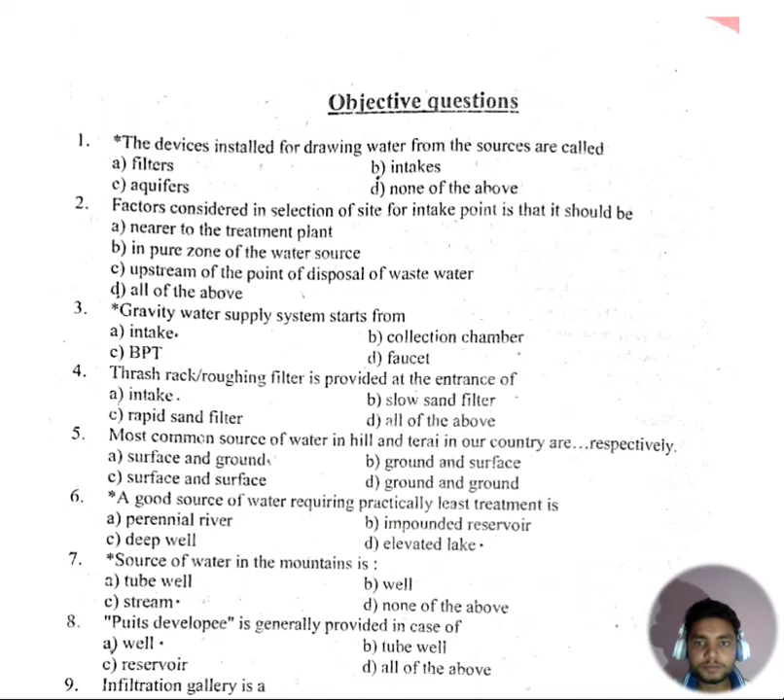Question number 4: A thrash rack roughing filter is provided at the entrance of. A is intake, B is slow sand filter, C is rapid sand filter, D is all of the above. The correct answer is A, intake.

Question number 5: Most common source of water in hill and terai in our country are respectively. A is surface and ground, B is ground and surface, C is surface and surface, D is ground and ground. The correct answer is A, surface and ground.

Question number 6: A good source of water requiring practically least treatment. Option A is perennial river, B is impounded reservoir, C is deep well, D is elevated lake. The correct answer is option D, elevated lake.

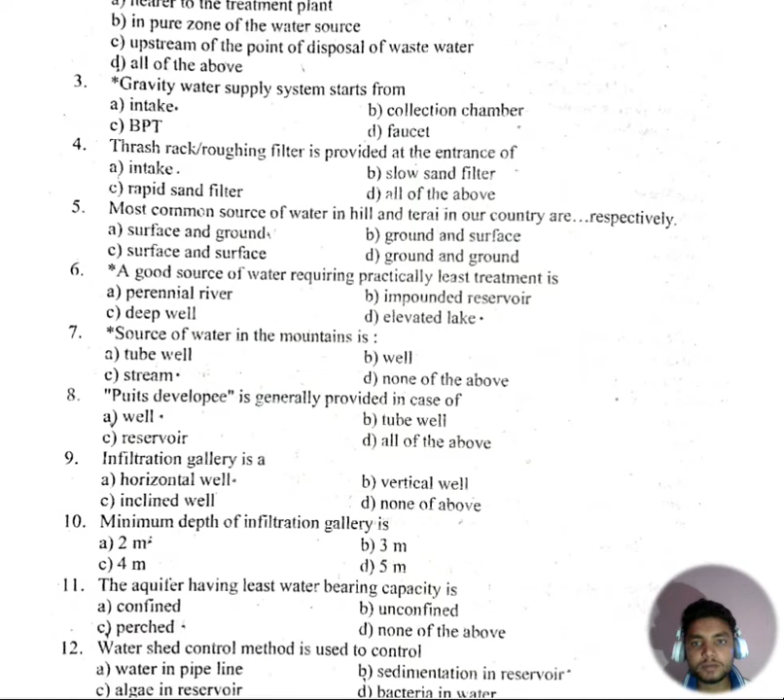Question number 8: Puits developee is generally provided in a case of. A is well, B is tubewell, C is reservoir, D is all of the above. The correct answer is option A, well.

Question number 9: Infiltration gallery is. A is horizontal well, B is vertical well, C is inclined well, D is none of the above. The answer is horizontal, option A.

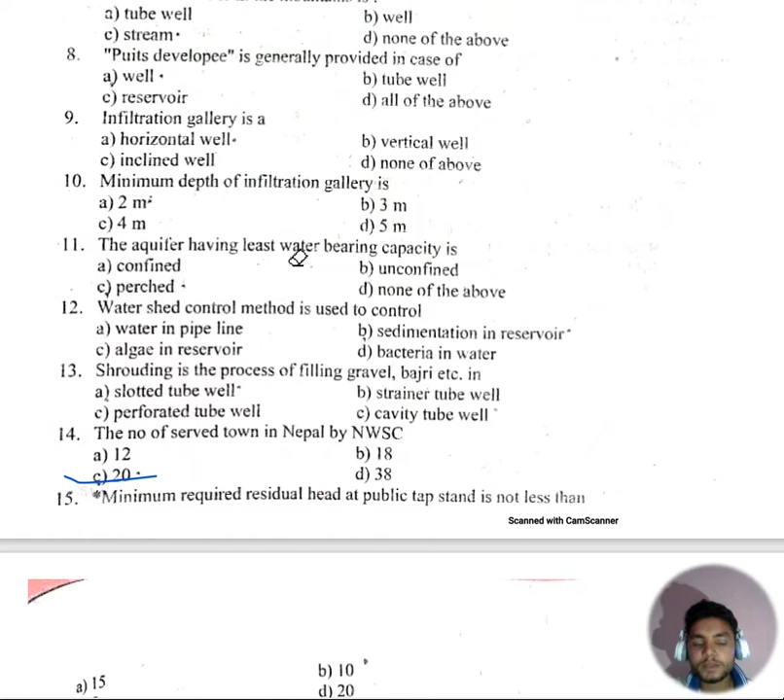Question number 15: Minimum required residual head of public tap stand is not less than. A is 15, B is 10, C is 5, D is 20. The correct answer is 5.

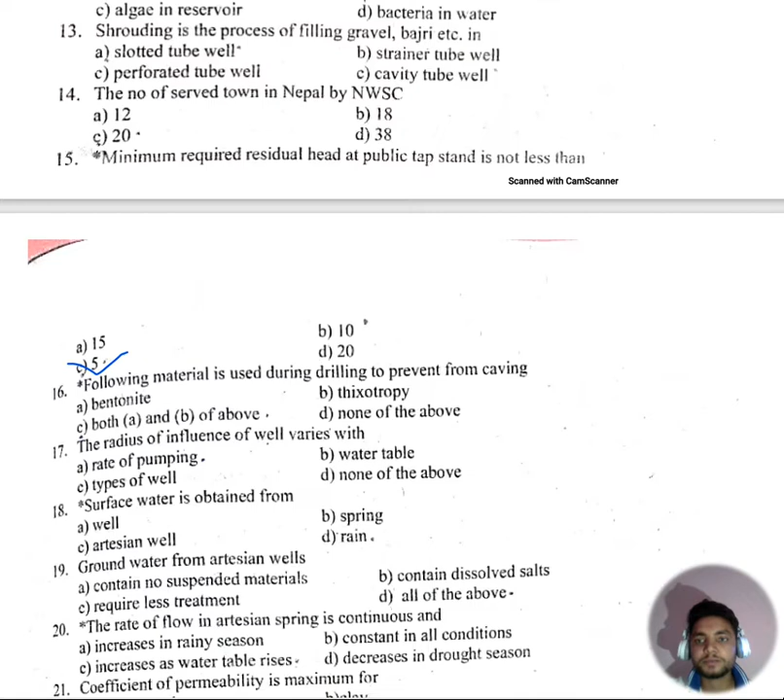Option number C. Question number 16: Following material is used during the drilling to prevent caving. Options are A - bentonite, B - thixotropy, C - both A and B, D - none of the above. The correct answer is option C, both A and B.

Question number 17: The radius of influence of well varies with. A is rate of pumping, B is water table, C is type of well, D is none of the above. The correct answer is A, rate of pumping.

Question number 18: Surface water is obtained from A) well, B) spring, C) artesian well, D) rain. The correct answer is D, rain. Surface water is obtained from rain.

Question number 19: Groundwater from artesian wells - A) contains no suspended material, B) contains dissolved salt, C) requires less treatment, D) all of the above. The correct answer is option D, all of the above.

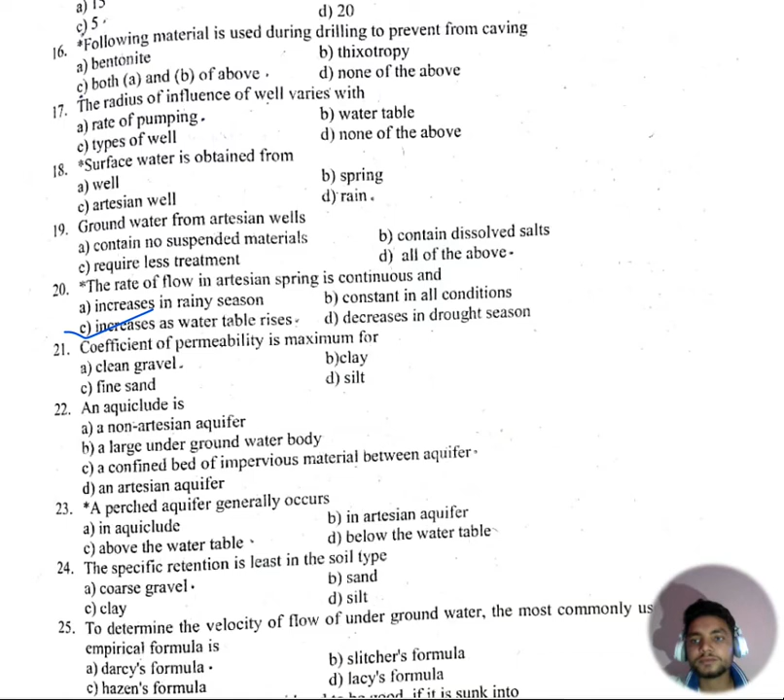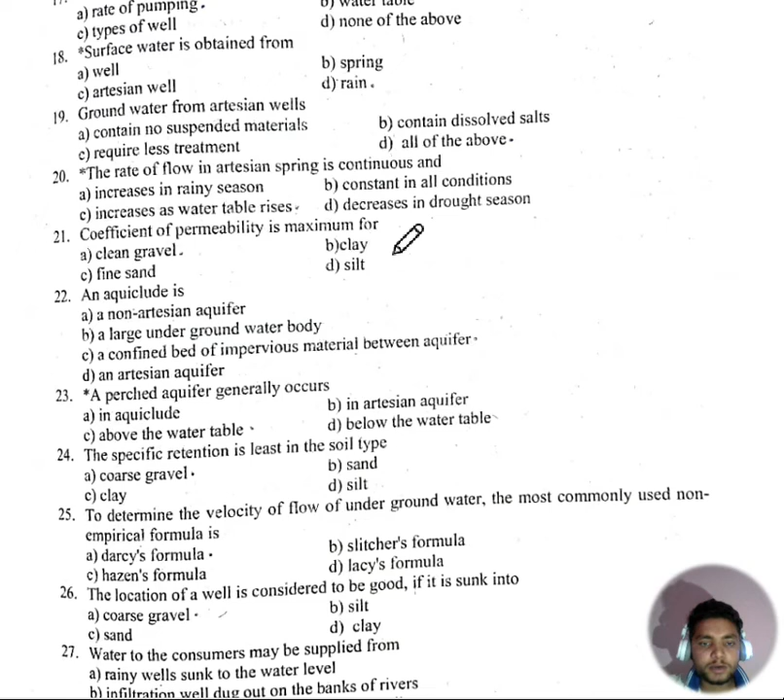Question number 21: Coefficient of permeability is maximum for clean gravel, clay, fine sand, and silt. The answer is clean gravel.

Question number 22: An aquiclude is A) a non-artesian aquifer, B) a large underground water body, C) a confined bed of impervious material between the aquifer, D) an artesian aquifer. The correct answer is C.

Question number 23: A perched aquifer generally occurs - A) in aquiclude, B) in artesian aquifer, C) above the water table, D) below the water table. The correct answer is option C, above the water table.

Question number 24: The specific retention is least in which soil type - A) coarse gravel, B) sand, C) clay, D) silt. The correct answer is A, coarse gravel.

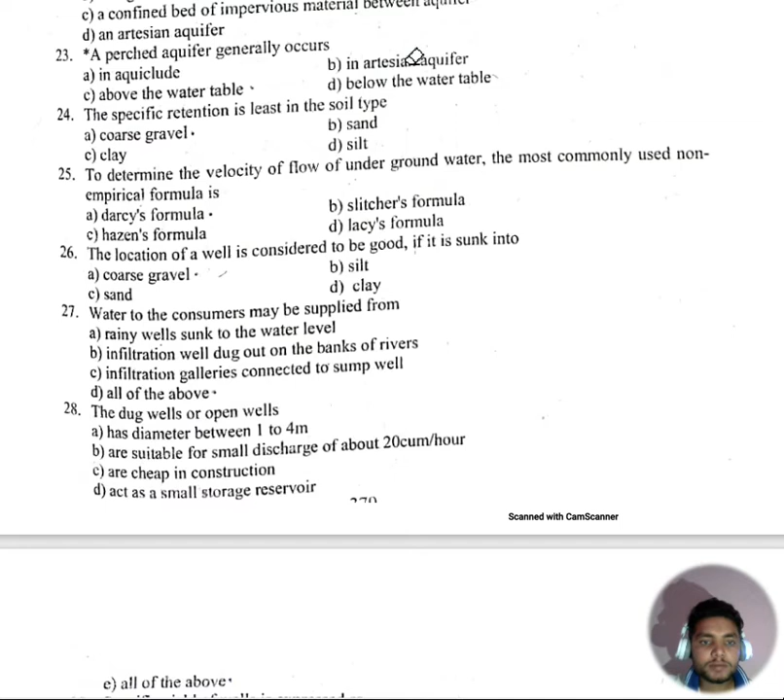Question number 25: To determine the velocity of flow of underground water, the most commonly used non-empirical formula is A) Darcy formula, B) Slichter's formula, C) Hazen formula, D) Lacy formula. The answer is Darcy formula.

Question number 26: The location of a well is considered good if it is sunk into A) coarse gravel, B) silt, C) sand, D) clay. The correct answer is coarse gravel.

Question number 27: Water to the consumer may be supplied from A) a rainy well sunk to the water level, B) infiltration wells dug out on the bank of the river, C) infiltration galleries connected to the sump well, D) all of the above. The correct answer is D, all of the above.

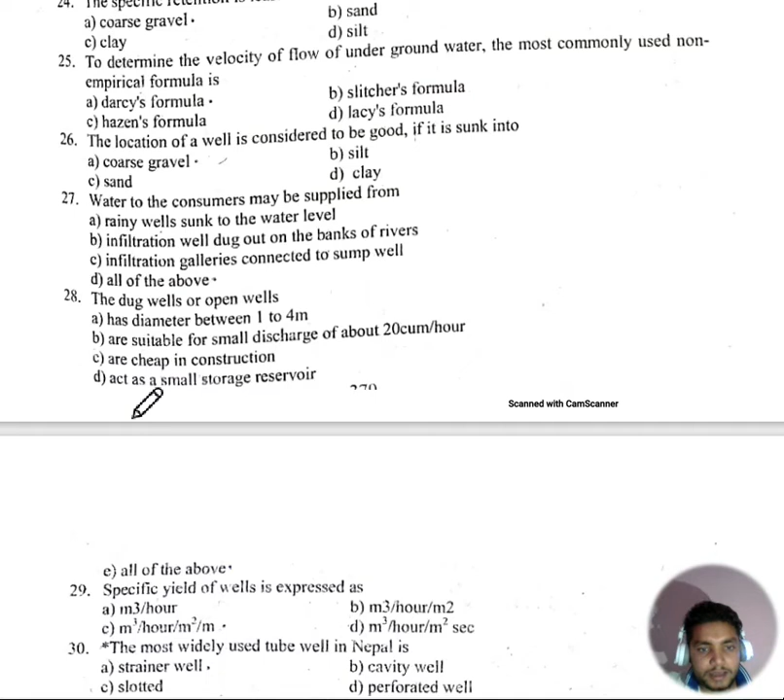Question number 28: The dug wells or open wells - A) have a diameter between 1 to 4 meters, B) are suitable for small discharge of water about 20 cubic meters per hour, C) are cheap in construction, D) act as a small storage reservoir, E) all of the above. The correct answer is all of the above.

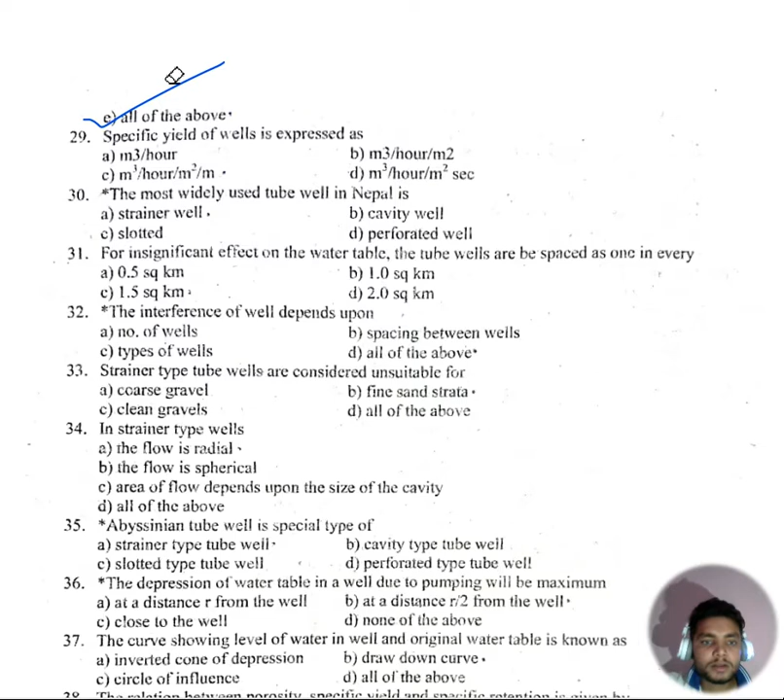Question number 29: The specific yield of the well is expressed as A) meter cube per hour, B) meter cube per hour per meter square. The correct answer is option C.

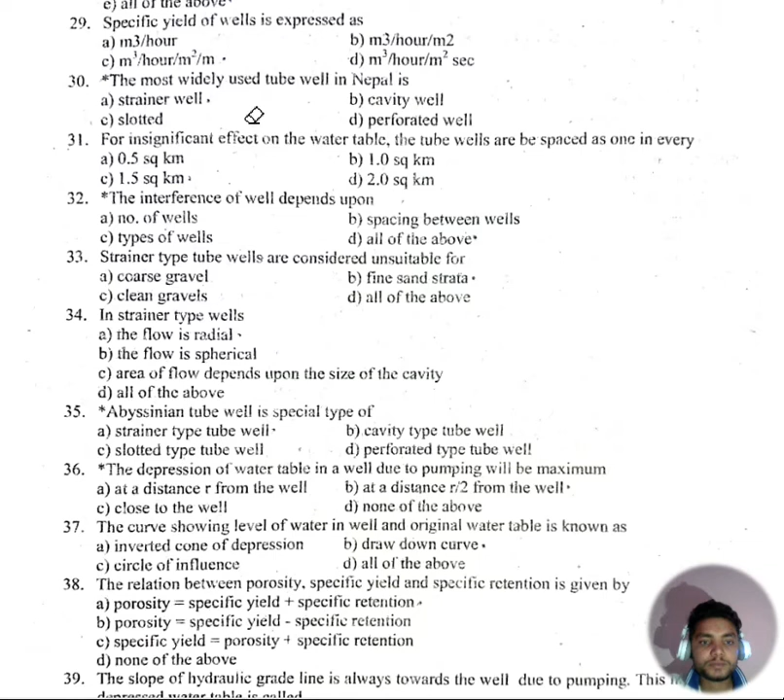Question number 32: The interference of wells depends upon A) number of wells, B) spacing between wells, C) type of wells, D) all of the above. The correct answer is all of the above.

Question number 33: Strainer type tube wells are considered unsuitable for A) coarse gravel, B) fine sand strata, C) clean gravel, D) all of the above. The correct answer is option B, fine sand strata

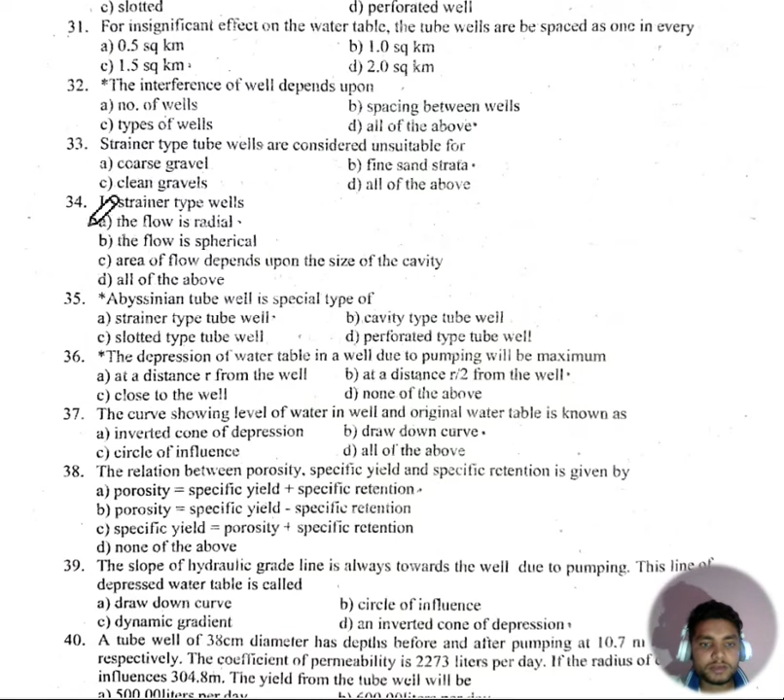Question number 34: In a strainer type well - the flow is radial, the flow is spherical, area of flow depends upon the size of the cavity, or all of the above. The correct answer is option A, the flow is radial.

Question number 35. Abyssinian tube well is a special type of: A) strainer type of tube well, B) cavity type of tube well, C) slotted type of well, D) perforated type of tube well. The correct answer is option A, strainer type of tube well.

Question number 36. The depression of water table due to pumping will be maximum: A) at distance r from the well, B) at the distance r/2 from the well, C) close to the well, D) none of the above. The correct answer is option B.

Question number 37. The curve showing level of the water in well and original water table is known as: A) inverted cone of depression, B) drawdown curve, C) circle of influence, D) all of the above. The correct answer is B, drawdown curve.

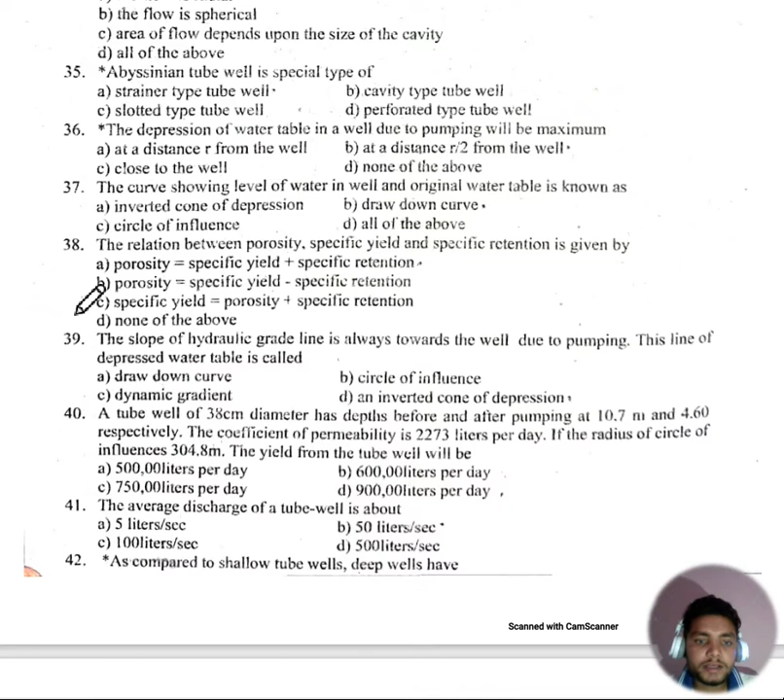Question number 38. The relation between porosity, specific yield, and specific retention is given by: A) porosity equals specific yield plus specific retention, B) porosity equals specific yield minus specific retention, C) specific yield equals porosity plus specific retention, D) none of the above. The answer is option A.

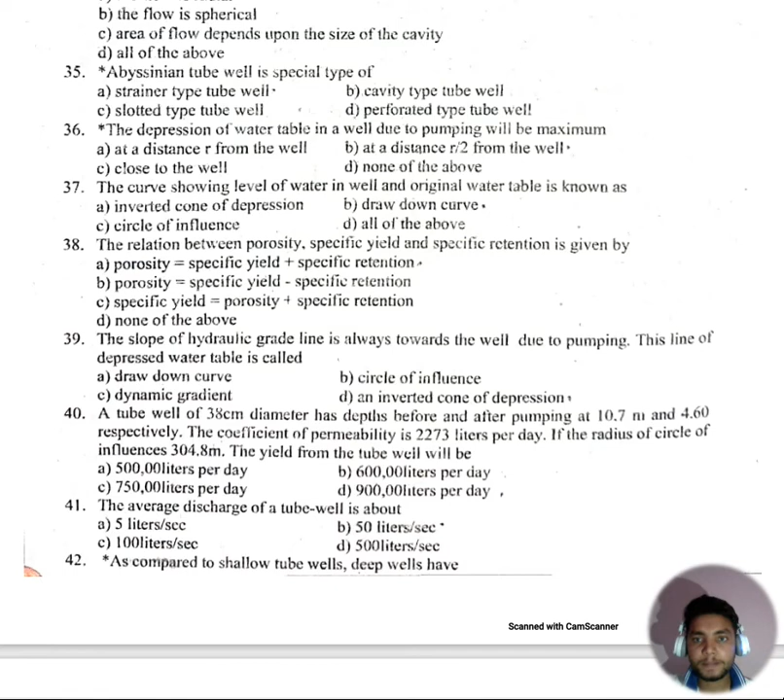Question number 39. The slope of the hydraulic grade line, always toward the well due to pumping, this line of depression of water table is called: A) drawdown curve, B) circle of influence, C) dynamic gradient, D) inverted cone of depression. The answer is option D.

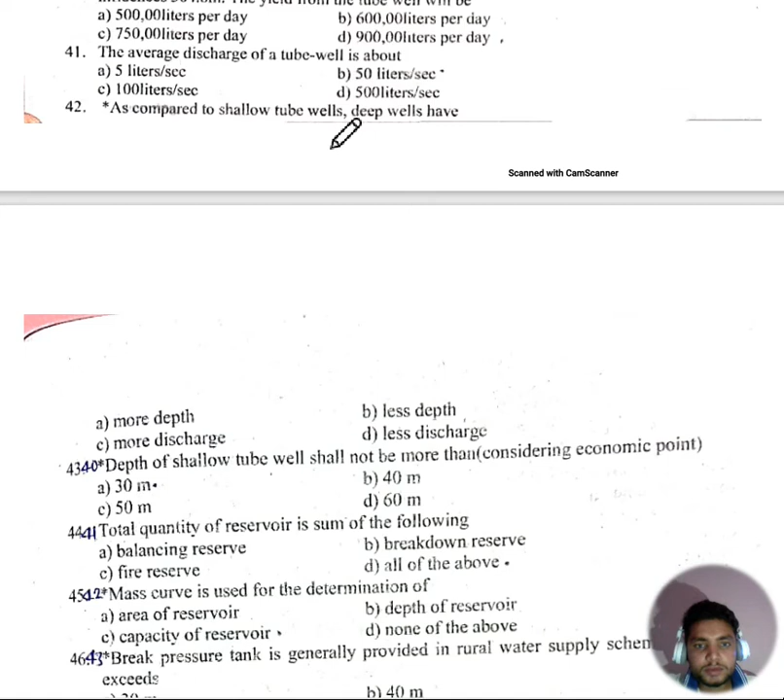Question number 42. As compared to the shallow tube well, the deep well has more depth. The correct answer is A, more depth.

Question number 43. Depth of shallow tube well shall not be more than, considering the economic point: A) 30 meter, B) 40 meter, C) 50 meter, D) 60 meter. The correct answer is option A.

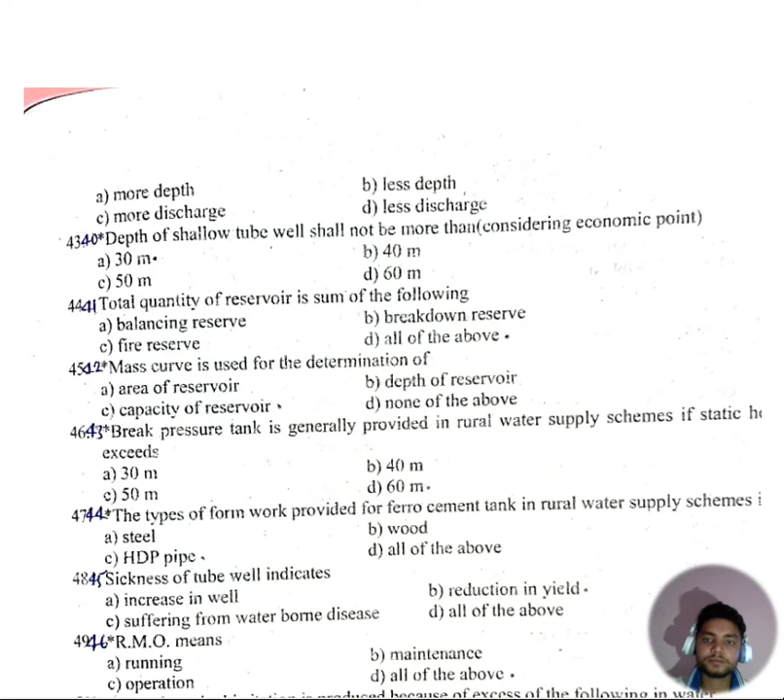Question number 44. Total quantity of the reservoir is the sum of the following: A) balancing reserve, B) breakdown reserve, C) fire reserve, D) all of the above. The correct answer is all of the above.

Question number 45. Mass curve is used to determine: A) area of reservoir, B) depth of the reservoir, C) capacity of reservoir, D) none of the above. The answer is option C, capacity of reservoir.

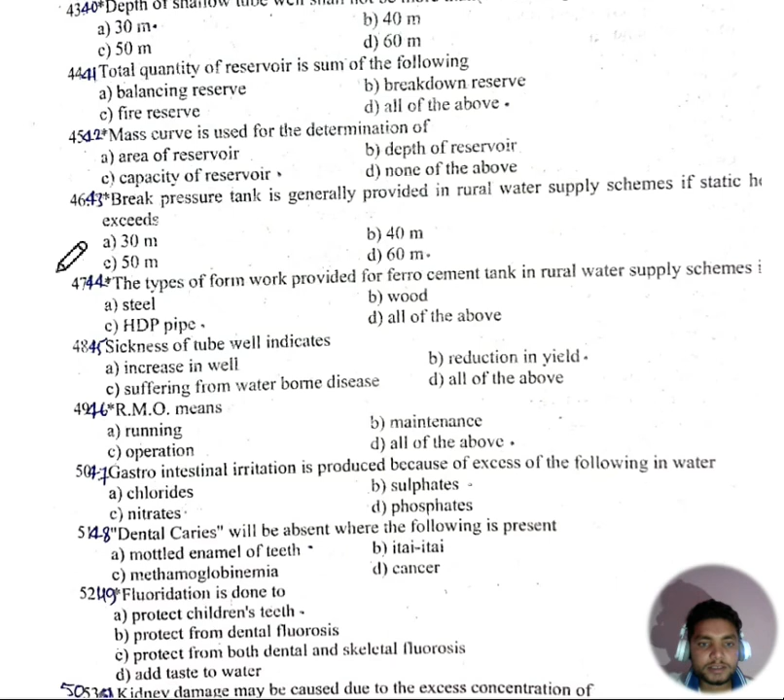Question number 46. Break pressure tank is generally provided in the rural water supply scheme to a static head exceeding: A) 30, B) 40, C) 50, D) 60. The answer is 60 meter.

Question number 47. The type of formwork provided from ferro cement tank in rural water supply scheme: A) steel, B) wood, C) HDPE pipe, D) all of the above. The answer is option C.

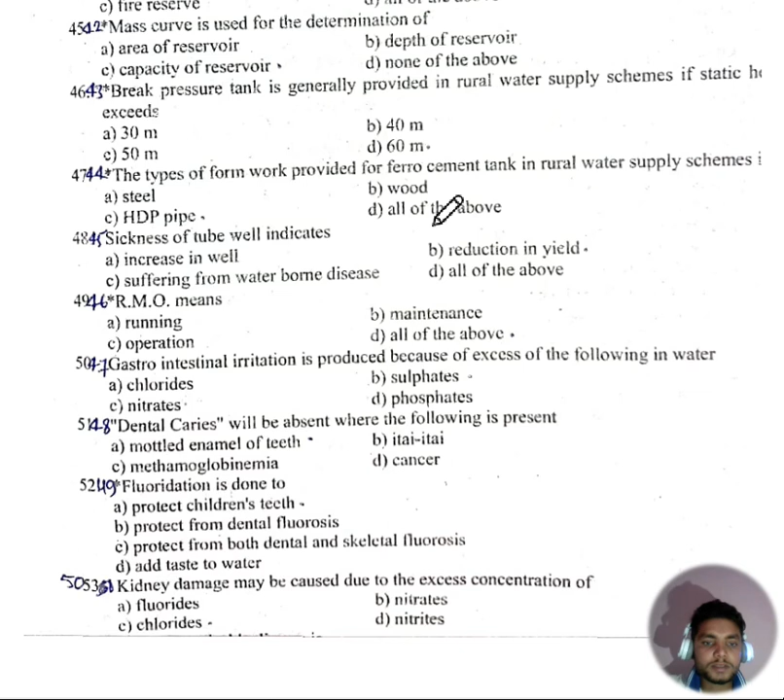Question number 48. Sickness of tube well indicates: A) increase in well, B) reduction in yield, C) suffering from water-borne disease, D) all of the above. The answer is B.